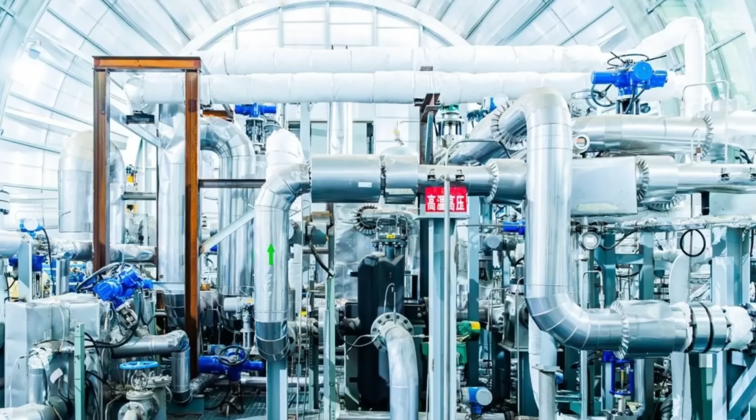Today, let's discuss this phenomenon and why it's kind of exciting, but also discuss this achievement from China that's referred to as Chaotan One. Although as always, this is also going to be based on several studies, specifically studies examining exactly how this phenomenon works, how efficient it is, and what we can possibly use it for in the future. But let's start with the basics, because in this particular case it's a little bit easy to misunderstand what's actually being achieved.

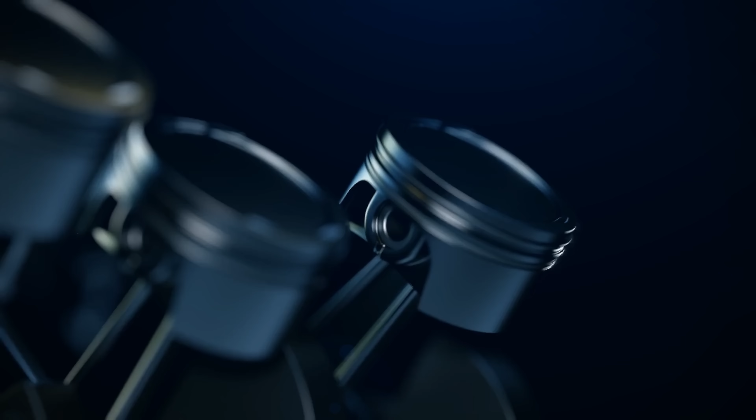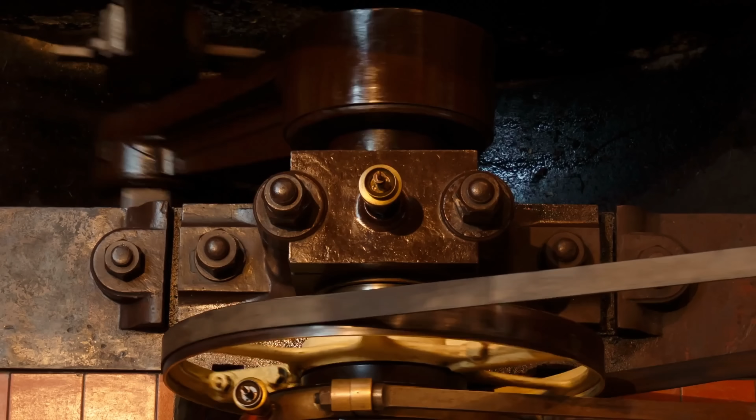Historically, for over a century now, the entire modern world has been mostly powered by the same technology, the steam technology. And we're not just talking about steam trains and steam engines, we're talking about everything around us. For example, coal plants, nuclear power plants, natural gas facilities, and most engines usually use the same basic physical principle. They usually use a turbine that's moved by steam generated by boiling water.

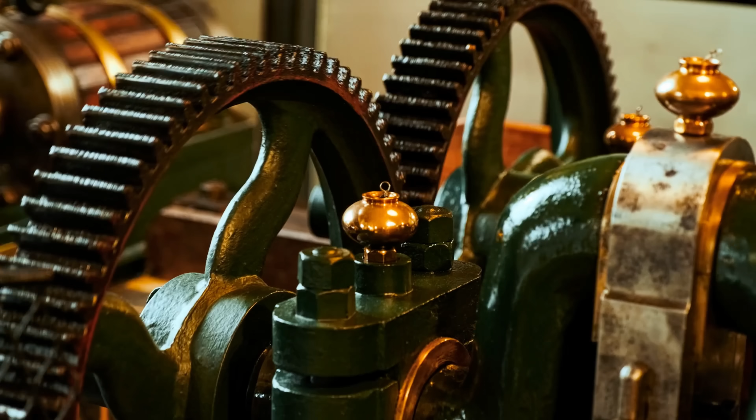And so even though it all started with something like this, today a lot of these devices use a very similar Rankine cycle, as it's also known, that basically involves a pump, a boiler, and a turbine. But the problem here is the fact that we have to boil water. And it turns out that by boiling water, we're wasting a lot of energy. Boiling water is extremely energy inefficient, making this type of engine waste a lot of energy on turning liquid water into steam. But nevertheless, for over 100 years, this is what we basically used.

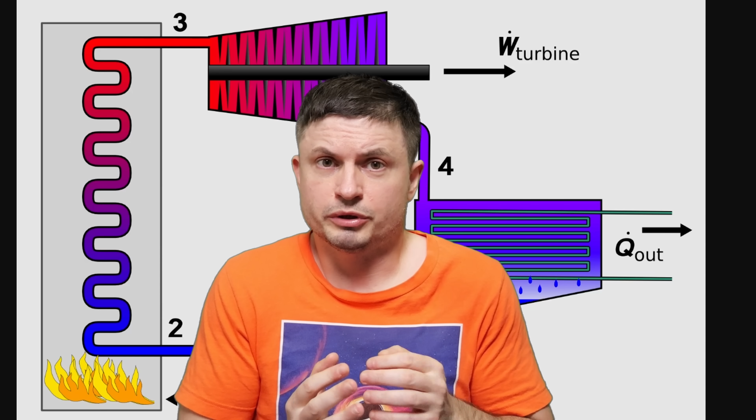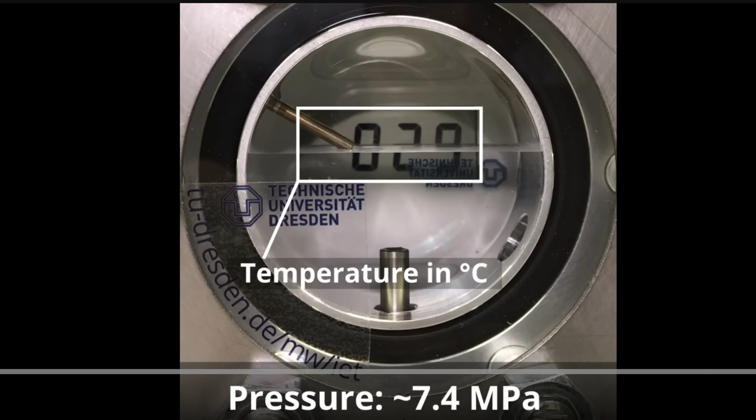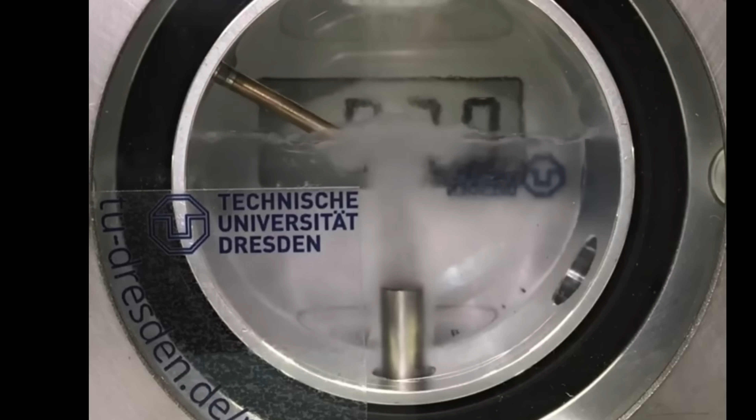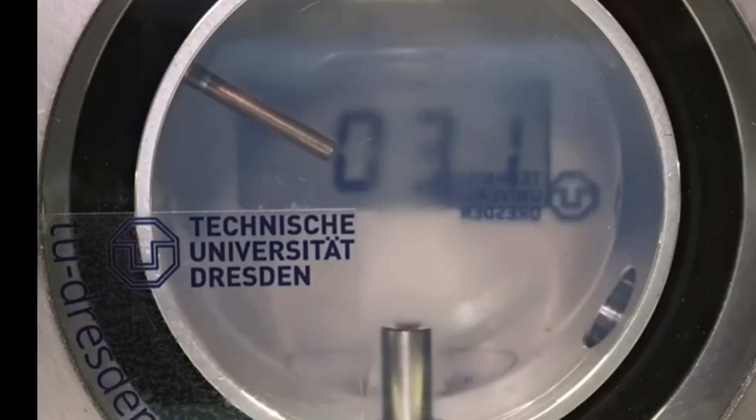And so in essence what you're about to see is a transition of the carbon dioxide from a liquid into what's known as supercritical carbon dioxide. Something that happens above 31 degrees Celsius or 87.7 Fahrenheit, and at pressures of approximately 7.37 megapascals. And it kind of starts to look like this. This is the supercritical state. And in this state, CO2 becomes a bit of a hybrid. It's not a liquid, it's not a gas, it's something in between.

It expands to fill the container just like a gas, which means it has very low friction, but it also maintains the density of a liquid, which is of course not a state of matter we're used to. Normally for CO2, we're used to it being just gas as we exhale it from our lungs, or sometimes we see it as dry ice when we buy something from a grocery store. Yet this entire research is based on this state, the liquid-gas hybrid, because apparently this is very useful for a lot of different things, but especially for moving energy.

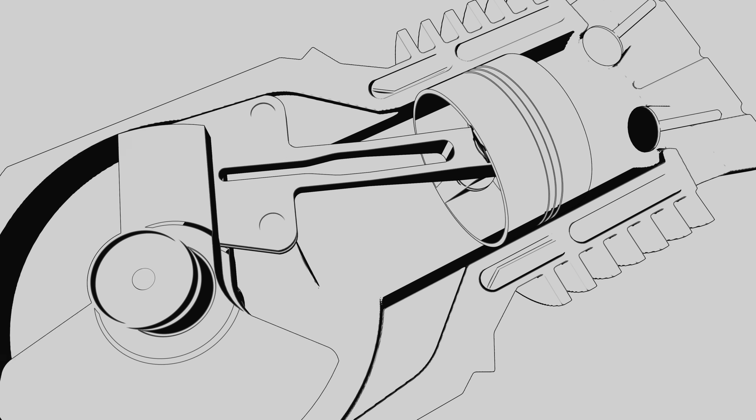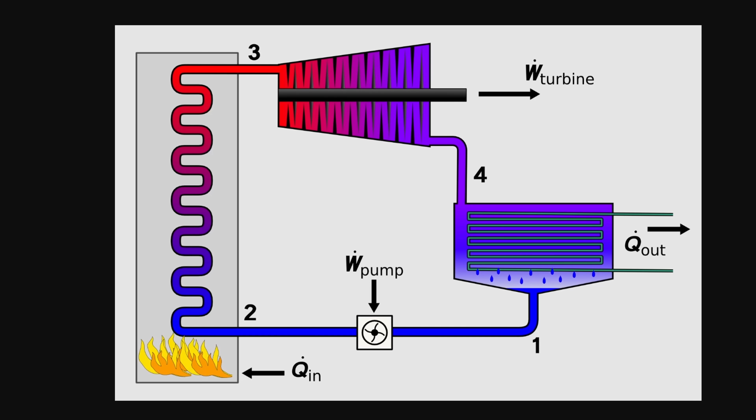You can think of it this way: because it's dense like a liquid, it can push the turbine with a lot of force, but without losing too much energy to friction, because it can also flow like a gas. And so it can easily move through pipes without losing energy like water, which makes this incredibly important for the efficiency of the system. That's because the traditional steam engine usually has a lot of little parts inside that force it to lose way too much energy. But once again, it's really that phase change that requires the most heat. And that's not something supercritical CO2 needs to go through.

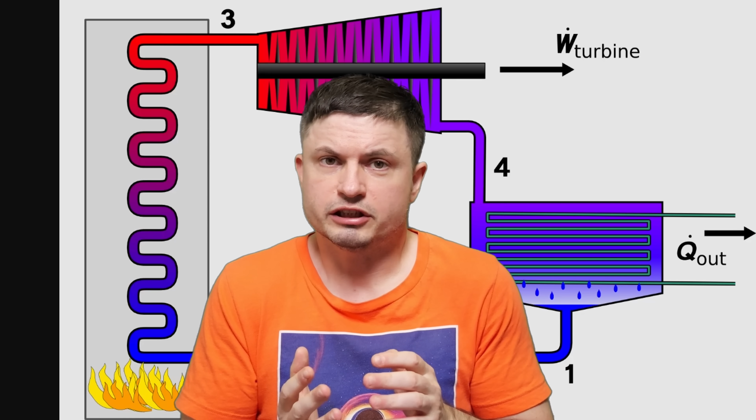Based on a lot of previous research, scientists discovered that if we were to replace water with CO2, in theory it can reach efficiencies of 50% or higher. And that's compared to approximately 38 to 40% for a typical water-based engine. But the reason you're hearing about this now is because finally there have been some major breakthroughs in just the last few years, especially on some major engineering bottlenecks.

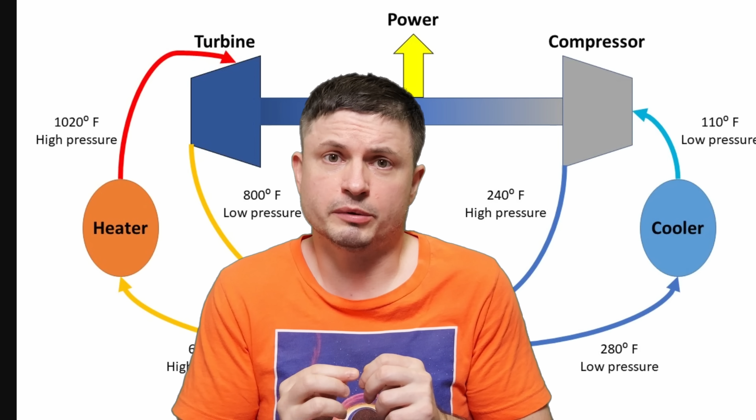And that's because for many years, engineers struggled with one major problem: how this supercritical CO2 affects the materials. And that's because at high temperatures and at high pressures, it can also be quite corrosive. But recent studies discovered that some materials are not actually affected by it, especially nickel-based superalloys.

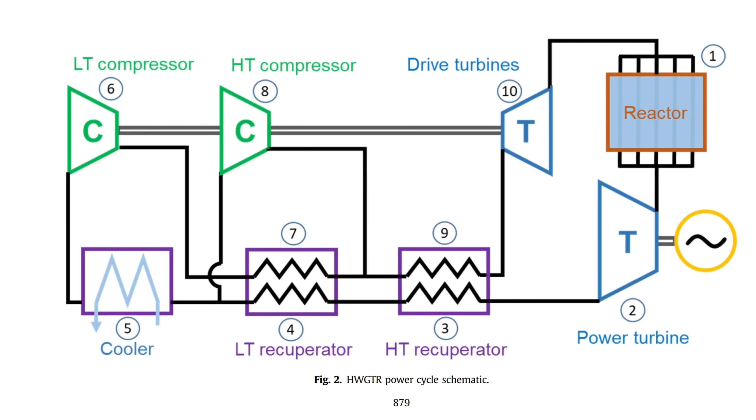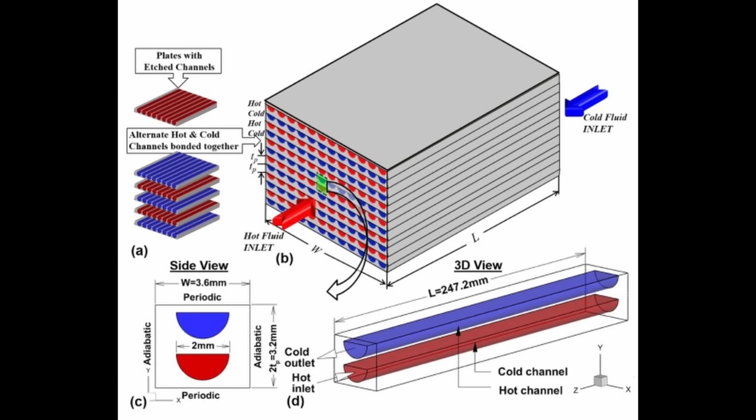On top of this, they also redesigned the overall structure of the engine and developed what's known as printed circuit heat exchangers, highly compact microchannel heat exchangers able to handle massive amounts of heat in a very small space. And so in just the last 10 years, quite a few different teams from across the planet created a lot of theoretical concepts and even prototypes that actually worked.

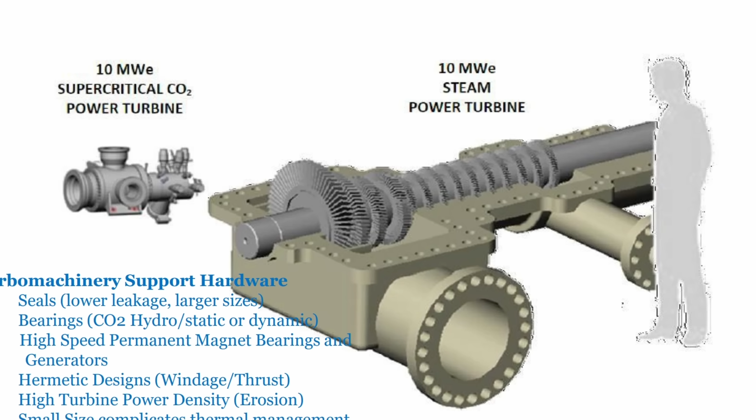And the best part about all of this was actually size. Because the fluid here is so dense, and because a lot of the parts are so small, the actual turbines can be tiny, with some of the earlier designs suggesting something very small, something that you can actually keep on your desk. And so in most cases they would be at least 10 times smaller than a typical steam-based engine, despite the fact that it produces exactly the same amount of power.

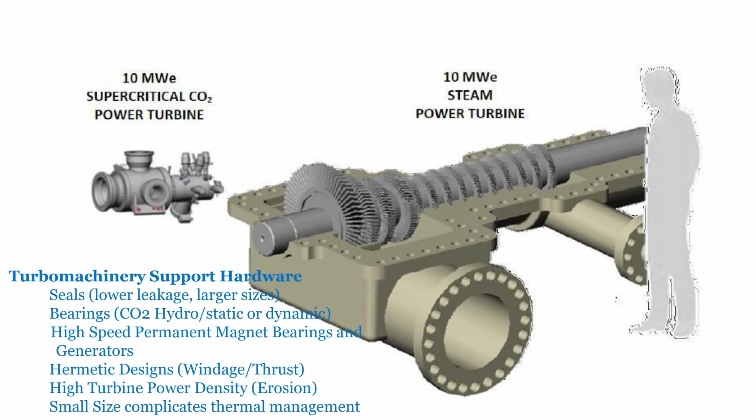And the first such proposition was back in 2013-2014, when some of the engineers from MIT created their first sample. And here they also discovered something else incredible about this design: operational flexibility. For a typical steam-based engine, it usually takes at least 30 minutes to warm up and start generating power. That's mostly because water has to become steam first.

But for a supercritical CO2 system, this can all be done in just 2 minutes, which actually makes it perfect for a modern grid that usually depends on a much faster response, especially because of a lot of renewable energies that can usually switch on and switch off much quicker. And so integrating this type of system into a modern grid provides way more benefits.

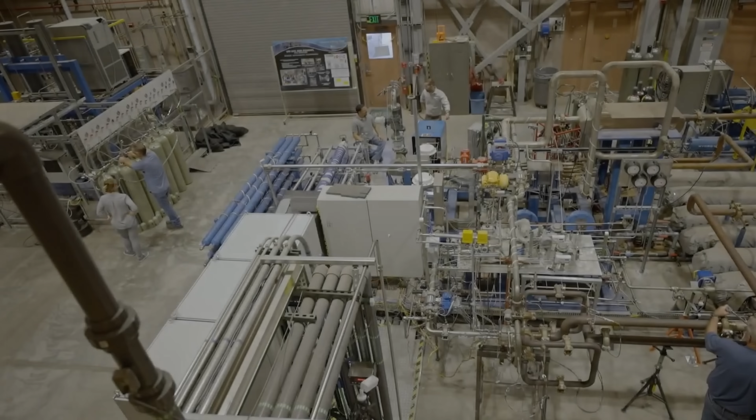And while for the past 2 decades or so, the United States has mostly been the leader in this technology, there have been some European teams as well, but they haven't gotten as far as the US. One of them is based on some of the early research from Sandia National Laboratory, that essentially created the prototype you see right here.

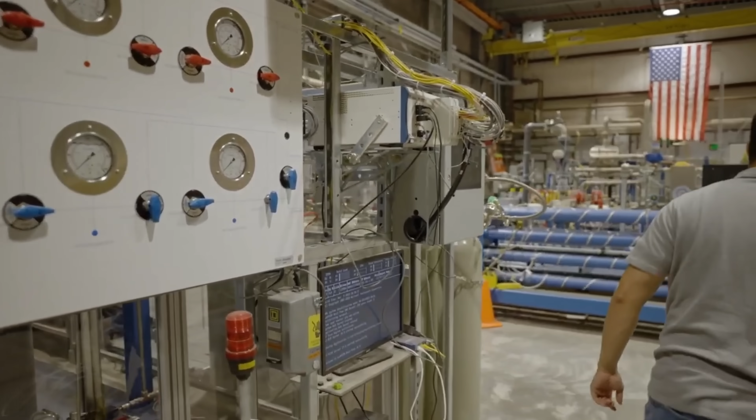Here they created a prototype that was able to generate electricity, that even a few years back was able to produce approximately 10 kilowatts. But more importantly, this was an official proof that all of this seems to function well, and it's able to integrate with the commercial power grid without disturbing it. And so this was actually a really important proof of concept.

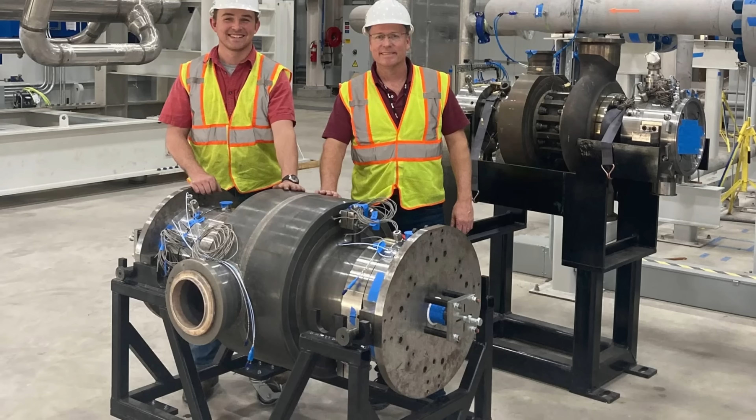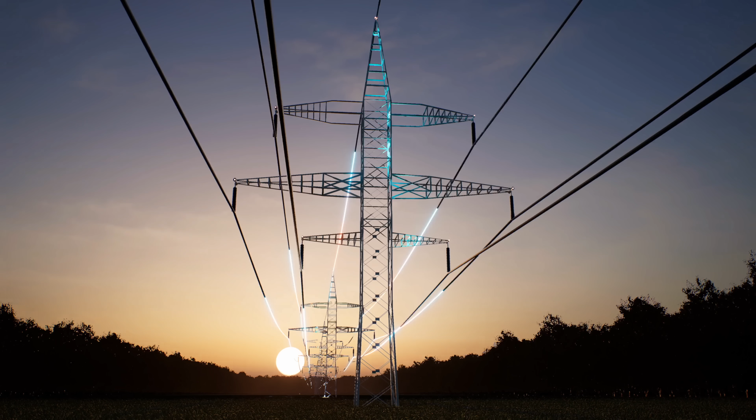But then just over a year ago, in May 2024, a much larger project referred to as STEP Demo, with a facility in San Antonio, Texas, was able to successfully generate 4 megawatts, reintroducing it into the grid. And so this $150 million project that was designed to prove that this technology works was finally able to show that it does work and can even function for a long term in relatively hot conditions of almost 720 Celsius. And so in 2024, this was actually a pretty big achievement.

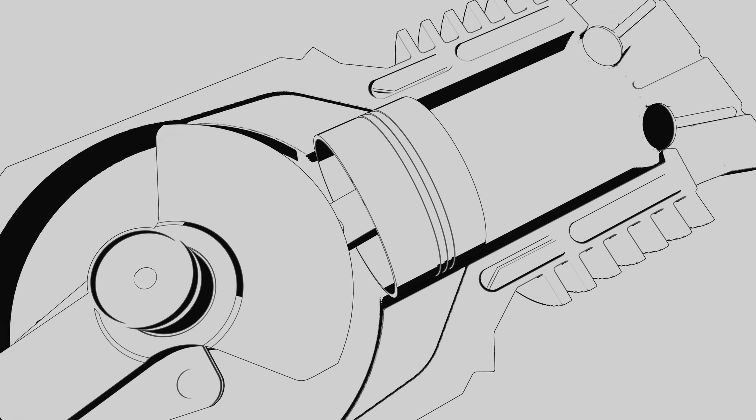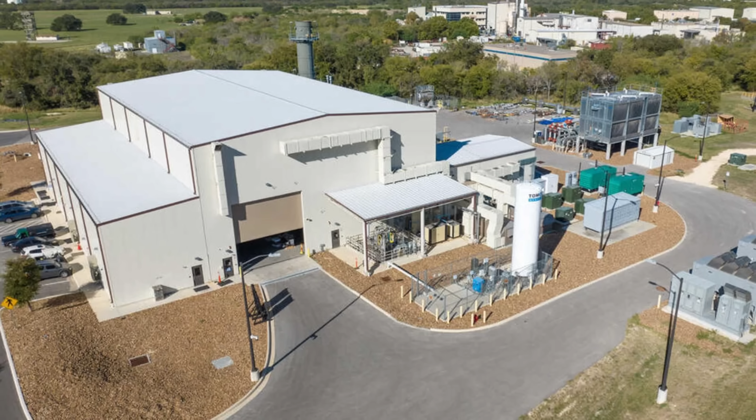But the thing is, these US projects were actually mainly focused on something slightly different. They were trying to prove that these designs are relatively secure and relatively safe. And that's because the main use for them would be in nuclear technology, in order to replace water-based nuclear reactors with something a little bit more efficient using supercritical CO2. And so they were not really inventing a new steam engine as much as they were trying to improve nuclear power plants. And so for a year and a half, we pretty much heard nothing.

And that's until China said, "Hold my beer." In this case, I guess it's Tsingtao beer.

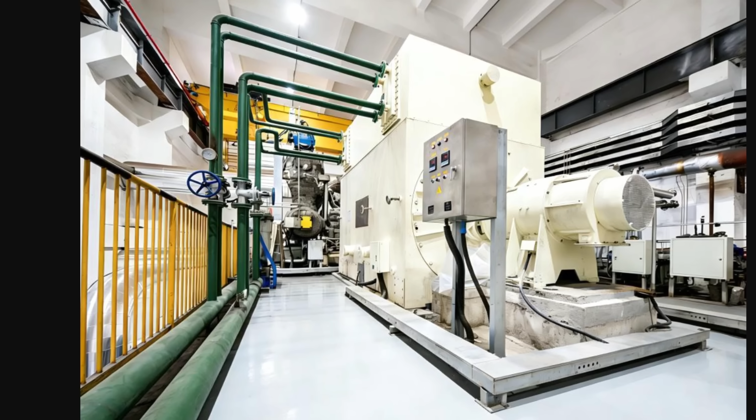And out of nowhere, we had this Chinese announcement that kind of blew everyone away. And that's because here they created something completely different in terms of scale and in terms of development. On December 30th of 2025, China announced Chaotan 1, the world's first commercial supercritical CO2 power generator. And so while the US was focusing on research and pilot plants, here we had something that was already working and already commercialized. And that's actually what makes this different.

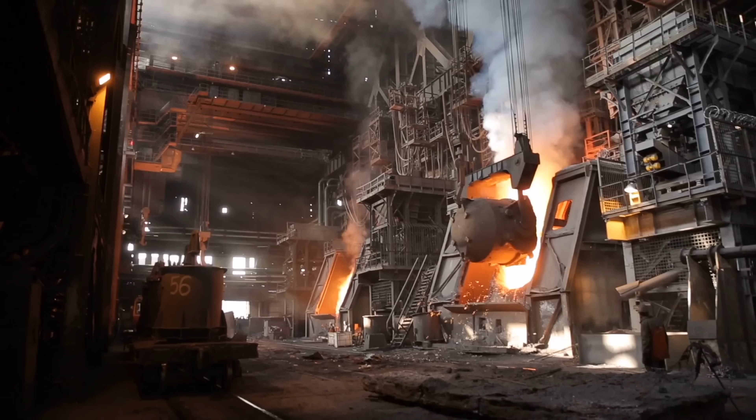This is not a lab experiment, it's already connected to an existing steel plant and is able to recover waste heat from that steel plant in order to then produce energy, with the energy supplied to the main grid. And so basically, this is all based on waste heat coming from a steel plant. The plant produces a lot of extra heat, the heat is then captured by the supercritical CO2 engine, and the engine produces electricity.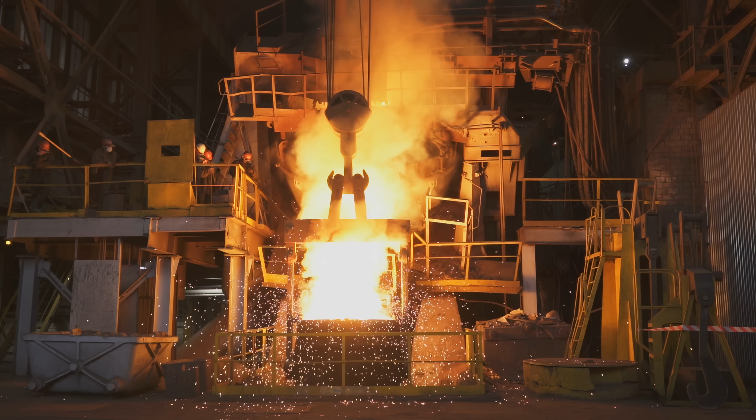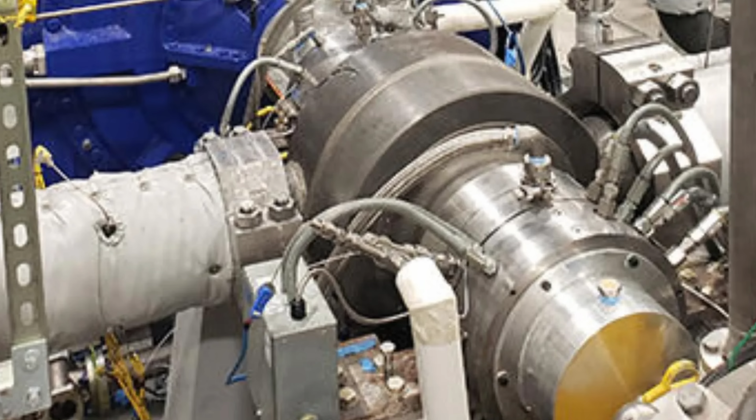And right now, all of the reports suggest that the system is at least 85% more efficient than any of the older systems this factory was using. And it also provides a 50% increase in net electricity output. But once again, what's even more impressive is that it's even smaller. Right now it takes up about 50% less space than before.

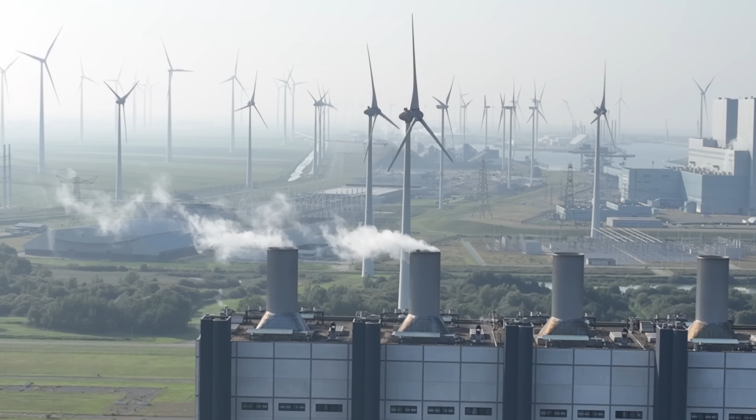Or I guess just to make this fair, here the comparison is to the legacy systems that were used in this plant, and not to some of the most modern and most advanced steam engines that might be a little bit more efficient. But even with that context, the fact that it's connected to the grid and is already generating revenue marks this as a major achievement, a major global transition in technology. We no longer have to use water, we can now use supercritical CO2.

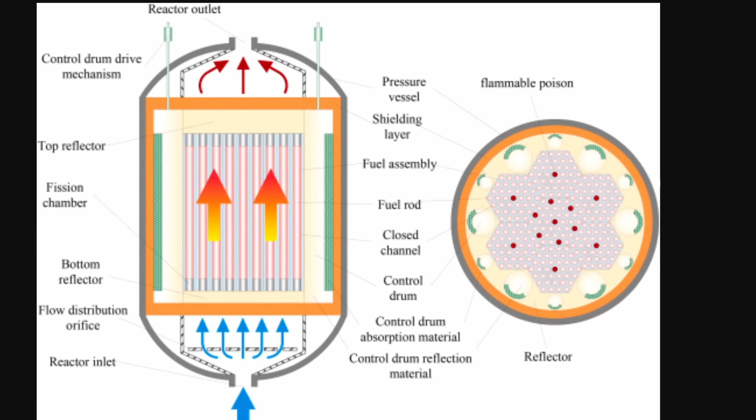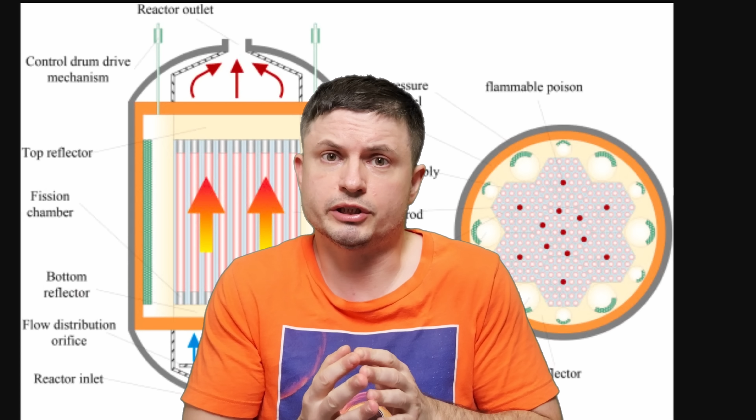And well, studies like this coming out of China essentially tell us what's basically the next step. Here, this particular study is based on a very similar design and presents a lot of exciting discoveries that can redesign a traditional nuclear power plant, which will then rely on supercritical CO2 for generating power. And so here, once again, instead of using steam and losing a lot of efficiency, the point is to use supercritical CO2. And this is basically the main goal for a lot of different teams.

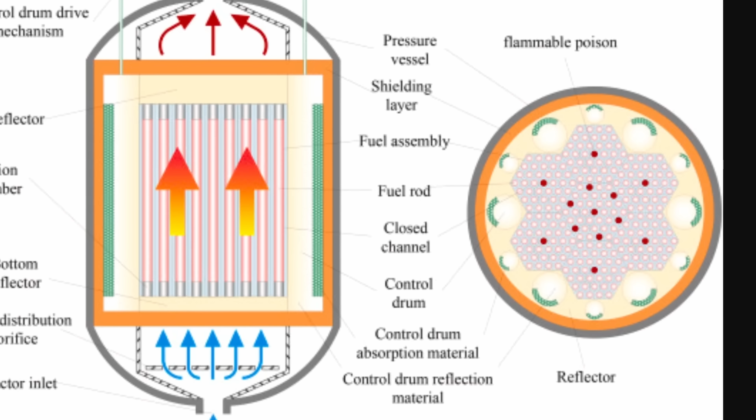Because by redesigning nuclear power plants and by creating something that's at least 20 to 30% more efficient, it will suddenly allow us to create so much more energy by using the same amount of nuclear material. And more importantly, it will make them simpler and safer. Because this uses supercritical CO2 as a direct coolant, it actually eliminates the need for steam generators and a lot of primary pumps and pressurizers. It basically makes the nuclear plant much less likely to fail and much less likely to have problems.

And that's because in a traditional power reactor, losing these pumps can be a disaster. But for these types of plants, if the gas cooling is ever lost, the heat will simply radiate into surrounding heavy water, preventing any potential meltdowns or any potential disasters. And so once again, by using supercritical CO2, a lot of these nuclear reactors can be much smaller, much safer, and even much cheaper to build because they require a lot less systems.

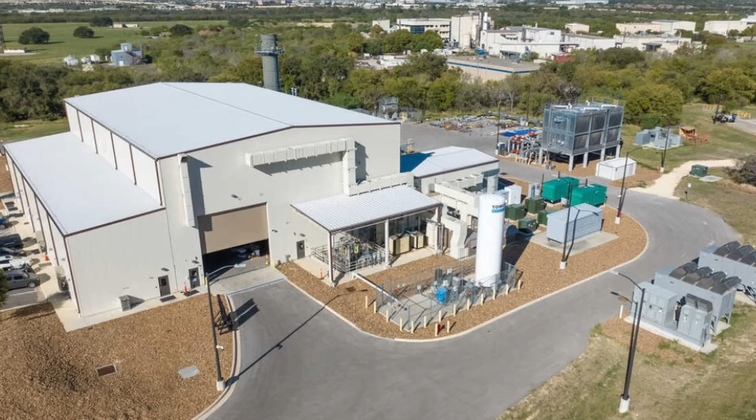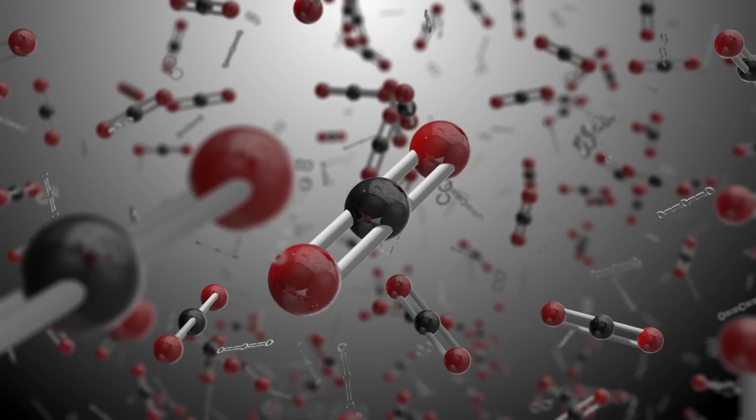On top of this, it also allows us to suddenly build a lot of these power plants in locations where it was previously impossible. And that's because before, we usually built these plants close to water sources. But for a supercritical CO2 system, since they're so compact and so efficient, they could actually be built pretty much anywhere, even in remote locations in the desert, which is actually what China is planning next. Their plan is to basically build a bunch of these in the middle of the Gobi Desert. But whether they succeed or not, only time will tell.

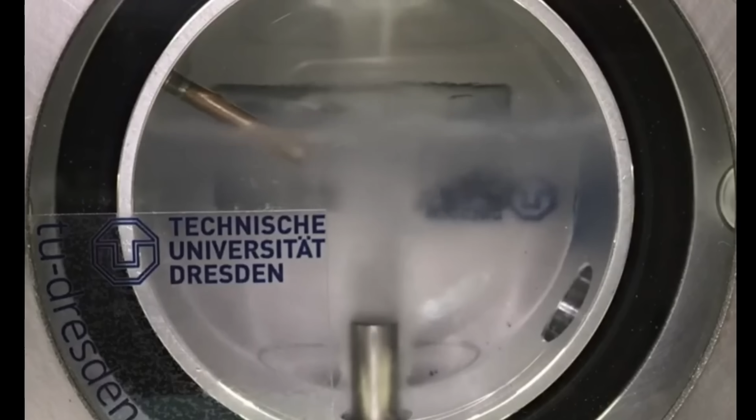Either way though, 2025 was officially the dawn of new power systems. Or basically we officially saw the introduction of completely new steam engines that have now moved from being prototypes and theory to an actual 30 megawatt power plant that's now producing commercial energy in China. Although here there might still be some challenges. Because this has just begun, we have no idea if there are going to be any long-term problems. And especially because, once again, supercritical CO2 under very high pressures is actually incredibly corrosive. And so we don't really know if it's going to cause any problems for this power plant after several years.

But once again, only time will tell what's going to happen here, and for all we know, we might have just entered a completely new era of energy production. But that's, of course, assuming everyone else can catch up to China and start making something similar in their own country. And so I guess the question is, did we just finally reach the end of the steam age? Have we just entered the age of supercritical CO2?